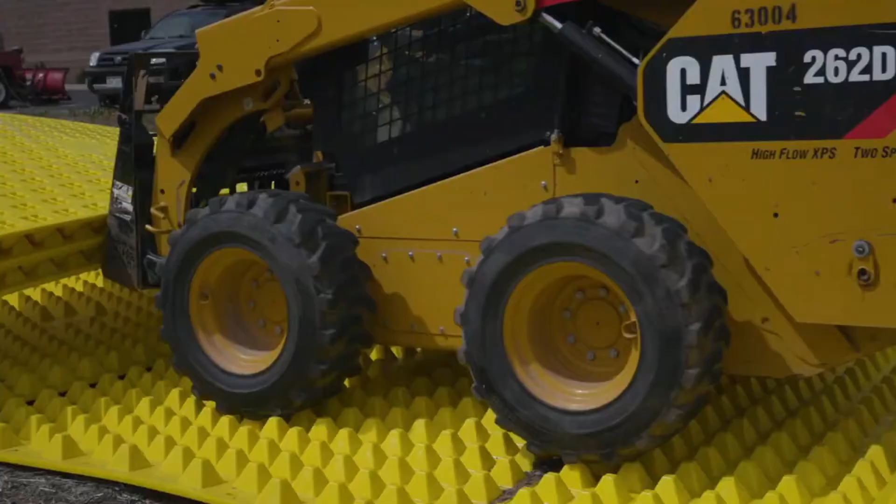Your FODS track-out control system can easily be transported and relocated by the equipment you have on hand. Prior to installation, check with your distributor concerning your hardware.

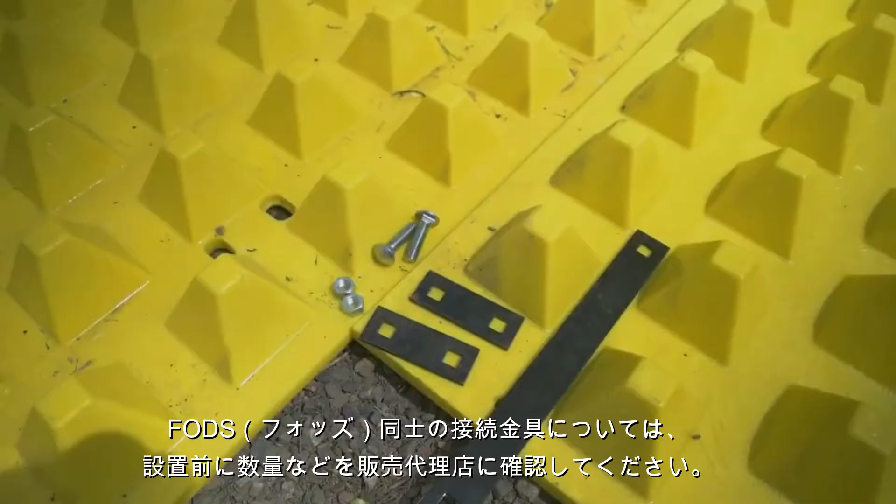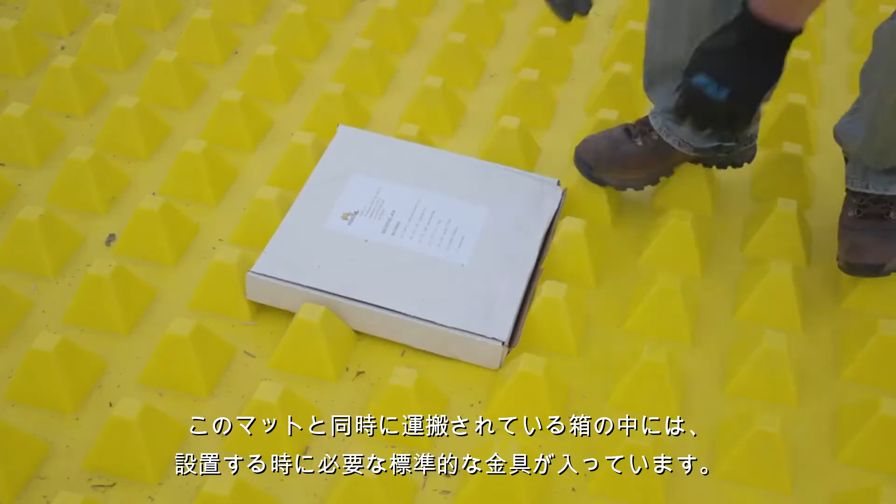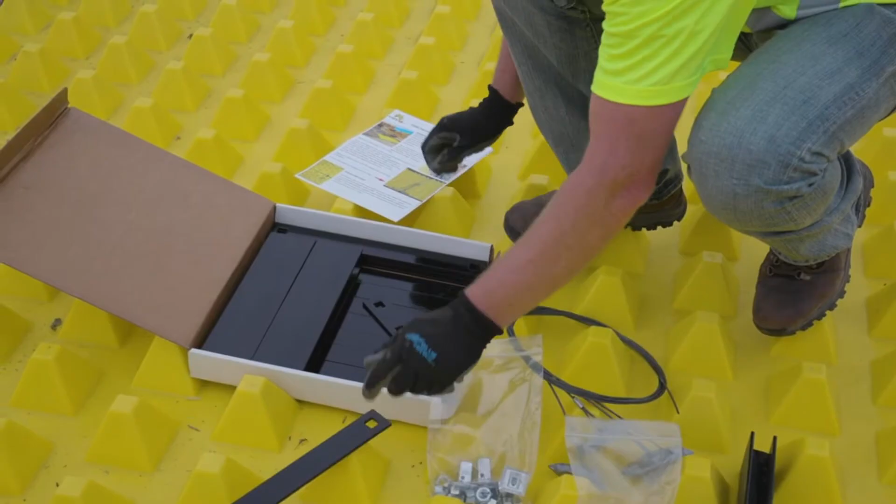Your hardware will be delivered in a black FODS bucket, or you will find the FODS hardware box nestled within the mats. The bucket and box contain the hardware required to complete a typical 4-mat installation. If you're doing an 8-mat installation, you will need 2 FODS hardware boxes or buckets. Your hardware box should contain long and short steel plates, nuts and bolts, and H-brackets. Here is a list of tools we recommend you have on hand for installation.

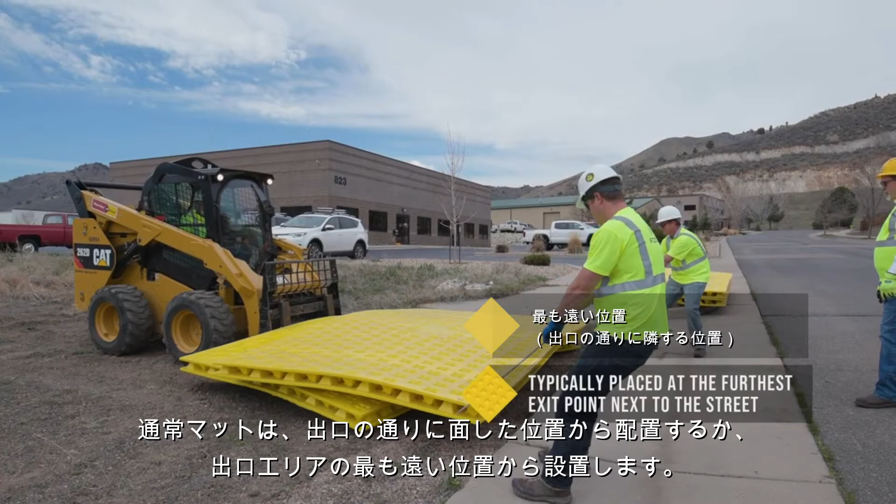When you're ready to install your system, map out where you would like to place the mats. Typically, the mats are placed at the furthest exit point next to the street, or the furthest point of egress. Place the mats in the appropriate configuration and then pull them into place using FODS hooks. Make sure to align the mats so vehicles exiting have a clear path of travel and are clear of obstacles.

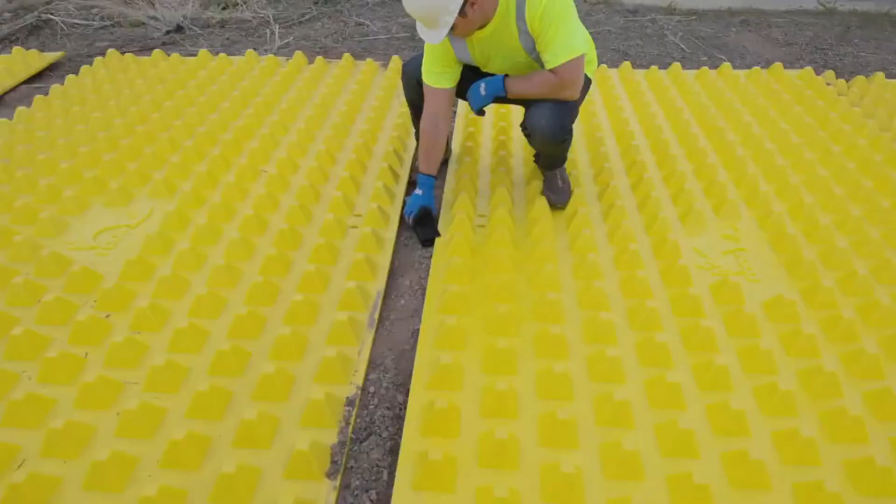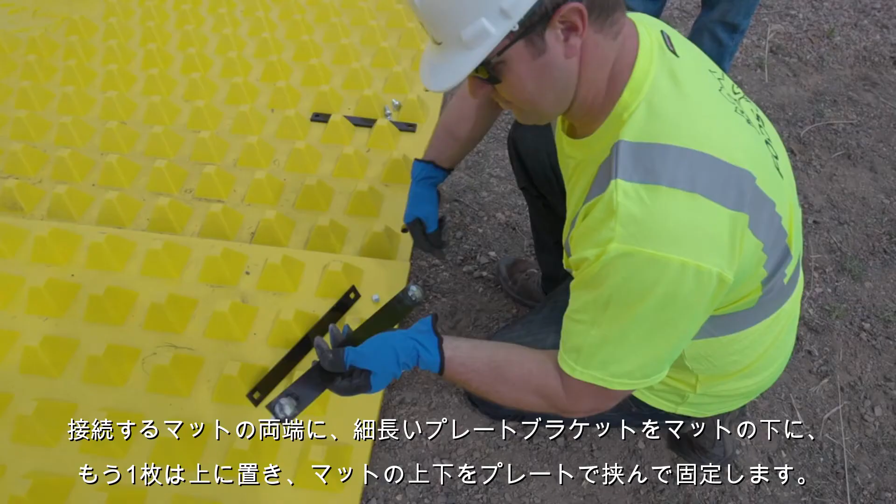Place the H-bracket in between mats so the lip of each mat is inside the H-bracket. Once the H-bracket is in place, pull mats together tightly using FODS hooks. Connect the mats together using 2 long steel straps.

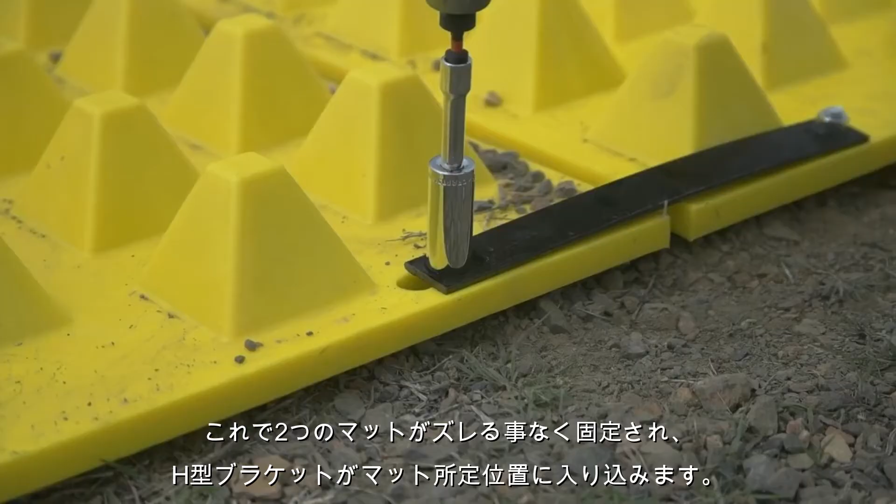Place 1 long strap under the edge of the 2 mats that will be connected. Place the second long steel strap on top of the mat. Align the holes, then push the bolt upwards through the mat and straps. Place the nut onto the upright bolt thread. Tighten the nut. Now the 2 mats will not pull apart, and the H-bracket will remain in place.

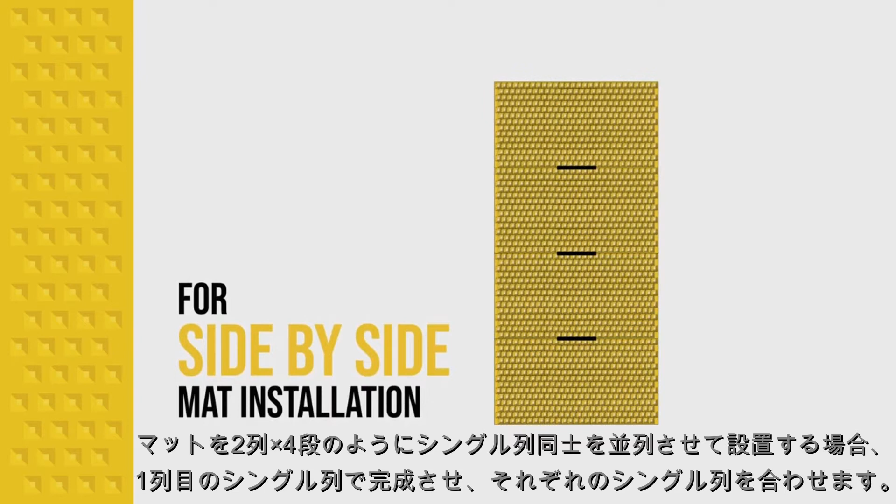For a side-by-side mat installation, such as a 2x4, install the mats as a regular single-wide orientation and add another single-wide mat adjacent to the first. On the entrance and exit mats, install the short strap as shown.

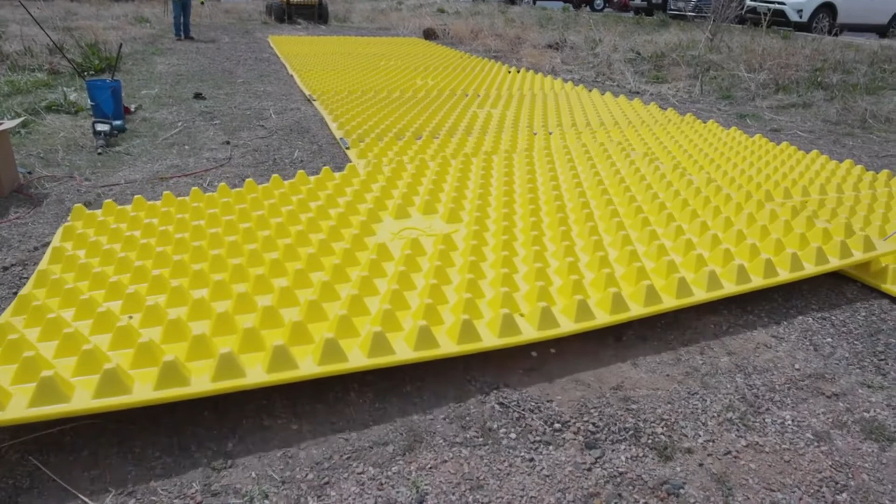A Fods track-out control system must be anchored in place for safety and to ensure proper performance. The best anchoring procedure will vary depending on use and substrate conditions of your job site.

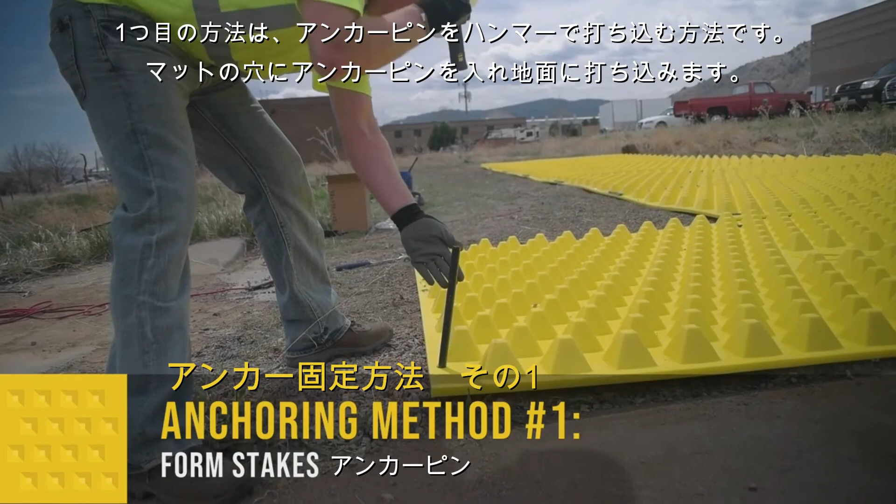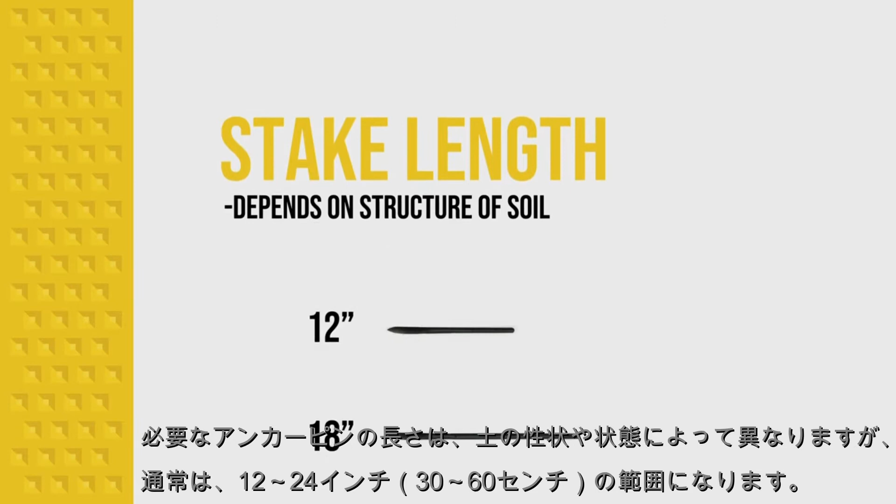In this first method, you will hammer form stakes into the mat's pre-drilled holes where the mat is most flush with the ground. Fods recommends a minimum of 2 stakes per mat, 1 per side. The length of the stake required depends on the structure of the soil. Stakes ranging from 12 to 24 inches may be used, 18 inches being the most commonly used type. Please ensure the stakes have been driven a minimum of 1 inch below the top of the Fods pyramids.

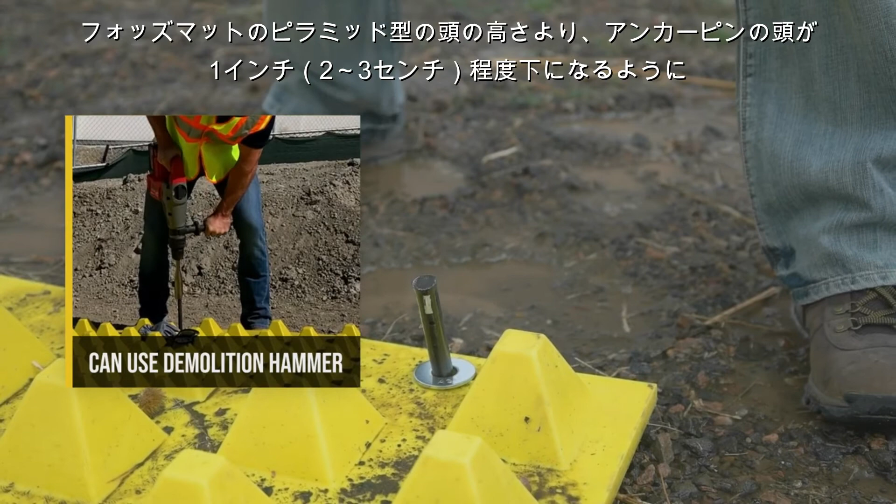To prevent mats from riding up on the stakes, place a washer over the stake and secure with a pin. Hammer the stake into the ground until the washer and pin are snug against the mat.

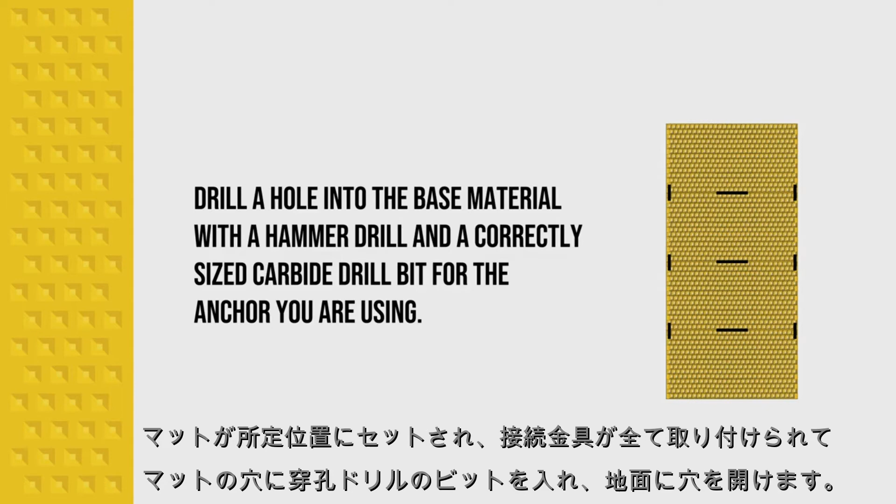To anchor the mats to asphalt or concrete, a concrete expansion bolt can be used. Make sure the mats are set in place and all hardware is properly connected. Drill a hole into the base material with a hammer drill and a correctly sized carbide drill bit for the anchor you are using. For ease, the drill bit can be inserted through the mat's pre-drilled hole where you intend to place the anchor bolt.

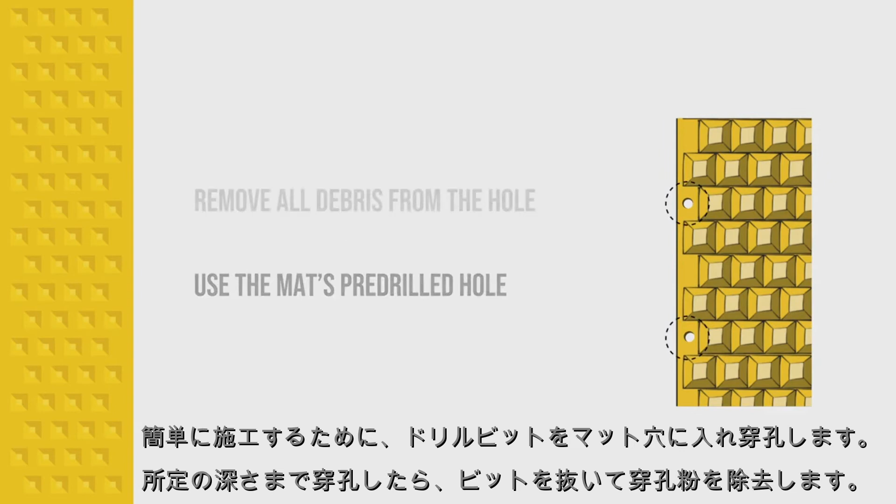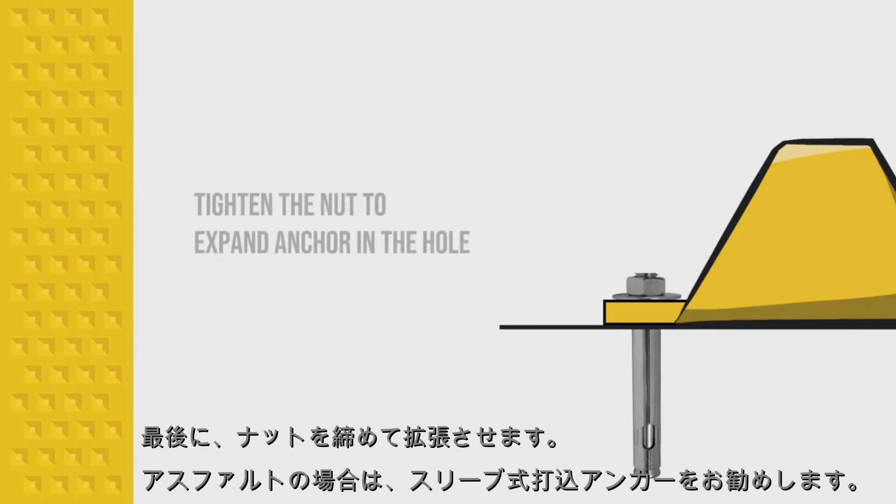Once the hole has been drilled to the proper depth, remove all debris from the hole. Next, insert the single expansion anchor into the hole and tap the fastener lightly with a hammer to ensure it is flush with the base material. Finally, tighten the nut to expand the anchor in the hole.

A sleeve anchor is recommended for installation on asphalt. The recommended anchor diameter is a 3/4 inch bolt, with a minimum embedment into the asphalt or concrete of 3.25 inches, or 4 inches from the top of the mat down into the hole.